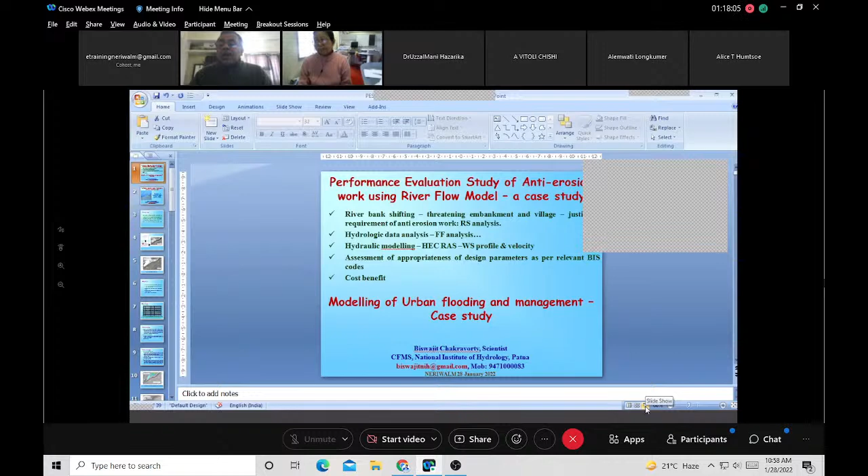Is the screen visible and am I audible? Yes, sir. Okay, so during the next 2 hours, maybe I expect I will finish in 2 hours. We shall be talking about two topics. Number one is performance evaluation study of anti-erosion work using a river flow model, and we'll be taking a case study.

As far as river shifting is concerned, we are all aware. When a river shifts, there is fear amongst the people living in the floodplain because it threatens embankments and villages. So in this presentation, I shall try to justify the requirement of anti-erosion work, whether it is at all required.

Here I shall take the help of remote sensing analysis. Then, if anti-erosion work is found necessary, we shall deal with hydrological data analysis, where we will carry out flood frequency analysis and compute the flood for different return periods. We'll also try to collect discharge data as well as cross sections available at the nearby site.

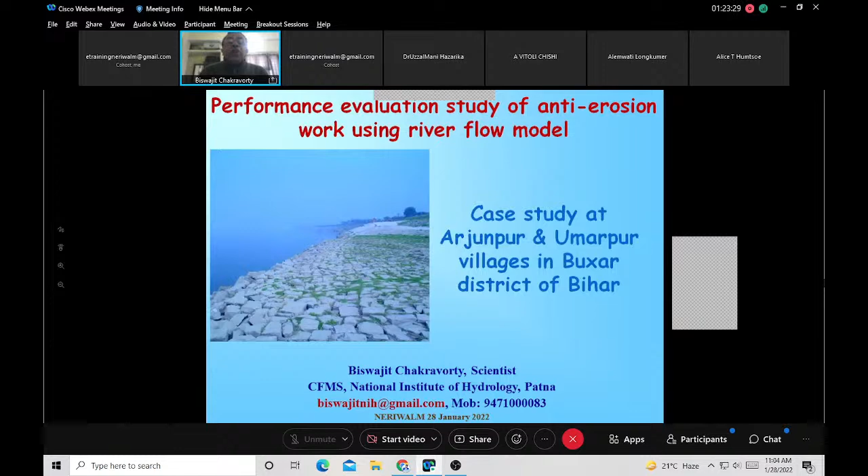So it's a case study at Arjunpur and Umarpur villages in Buxar district of Bihar. I shall be presenting this case study. First of all, let me familiarize you with the location of these two villages. The study area is...

near the Buxar Koilwar Ganga embankment. It is located on the right bank of river Ganga. The river Ganga has touched the embankment. This is the background of the anti-erosion work. The river Ganga has touched the embankment near Arjunpur and Umarpur village, and therefore the anti-erosion scheme was constructed during 2002. So the sites are located in Buxar district of Bihar.

First of all, see this case study, why I am presenting it - this will give you an insight into the step-by-step procedure to be followed. First of all, the remote sensing study, which will tell you whether the village is in danger, whether the embankment constructed is in danger, whether there is a likelihood of the embankment being breached and the flood water entering the village. That is what happened in these two villages in the past.

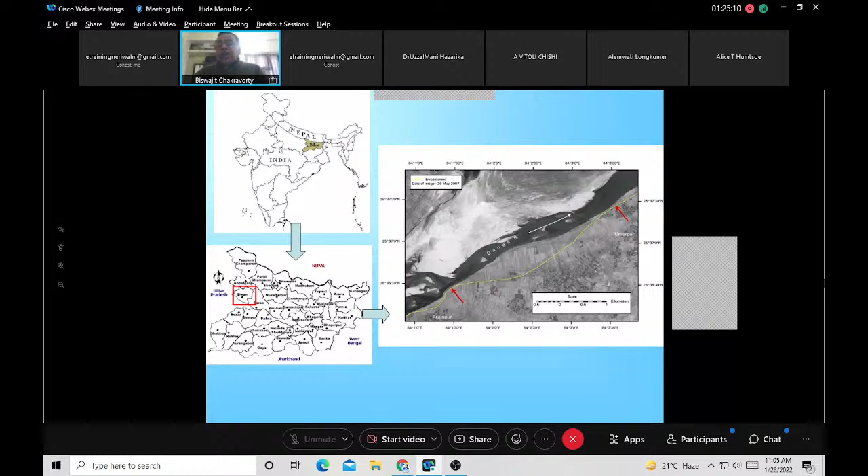So first, let us try to know why these anti-erosion structures were necessary. This is the anti-erosion work that was constructed in 2002 for a chain length of 30 chains. Each chain is 30 meters in length, so 30 chains means 900 meters. This is 900 meters. And similarly, in Umarpur, there is an anti-erosion work that has been constructed.

So this is about what has been done, and this is the blow-up of the location map of the study area. Now, the project objectives.

Preparation of a map showing the river bank line and embankment condition before and after the project. Am I audible? Hello? Yes sir, you're audible, sir. Okay, then let me proceed further, because with net connectivity, sometimes we are not sure whether my voice is reaching you or not. That is why I am very much concerned.

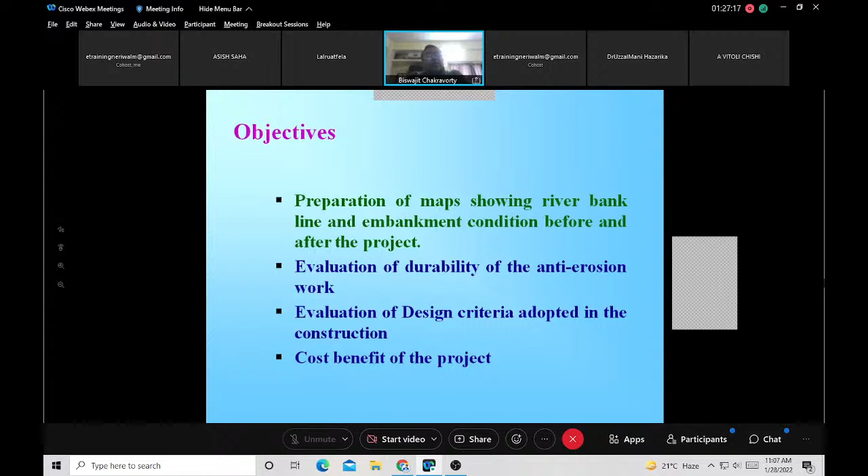So preparation of a map showing river bank line and embankment condition before and after the project. We were asked to find out whether the anti-erosion work was necessary. Number two, if the anti-erosion structure was necessary and it has been constructed, what is its fate once constructed? So evaluation of durability of the anti-erosion work, evaluation of design criteria adopted in the construction, then cost benefit of the project.

Since the first part of the study was dealing with remote sensing data analysis, we had to get the remote sensing data. So we used IRS 1C, 1D. Along with that, we also used PAN data so that we get details of the embankment and other details. At the same time, we also had the Cartosat data having a resolution of 2.5 meters. PAN data is 5.8 meter resolution. So this is about the satellite data that we have used.

Along with that, we have used hydrological data from CWC, annual maximum GD site at Buxar, river cross section from Water Resources Department, Government of Bihar, as well as from CWC. Then a socio-economic survey - we went to these two villages to ask the inhabitants whether the anti-erosion structure had benefited them.

So the methodology: preparation of river bank line and embankment maps. Here we have analyzed temporal satellite data. It consists of georeferencing of images of various dates, delineation of - as you saw earlier, these two villages are located on the right bank of the river Ganga - delineation of the right bank of river Ganga and delineation of the embankment. Satellite images are also analyzed for assessment of any damages or flooding in the nearby area. So this is the first thing we have done. Now let us try to see the details.

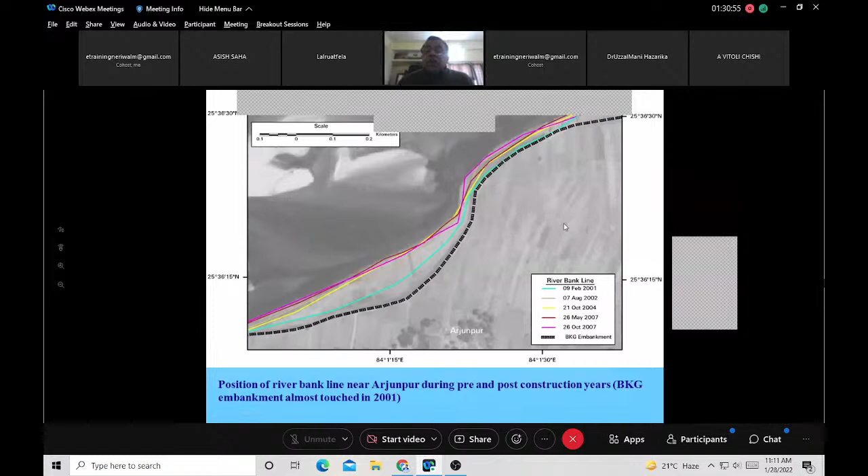So once the water entered into the village, villagers tried to go away from the village and find their livelihood somewhere else. So there was a shifting of the inhabitants of the village from Umarpur as well as from Arjunpur.

Second thing what we did was evaluation of durability. So here we have studied the river bank line and embankment condition to assess the effectiveness of the structure to sustain the annual peak flood.

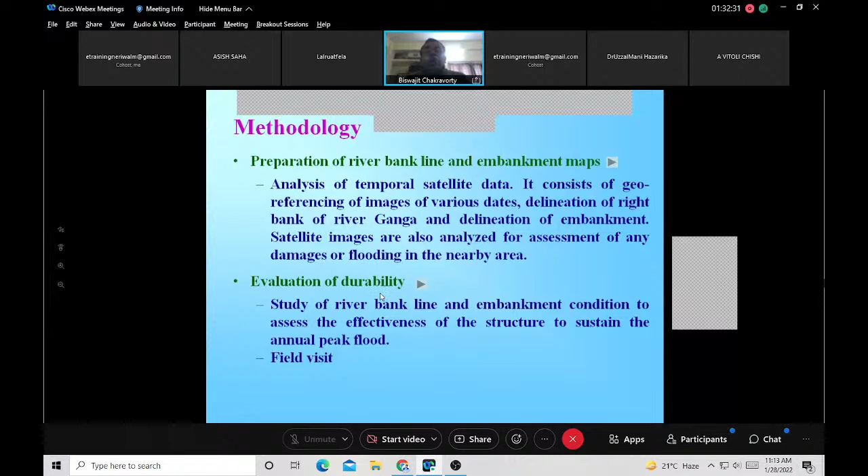So we had the data prior to the construction, during the construction, and after the construction. Let us try to see before, during, and after the construction of the anti-erosion work, what is the fate of the bank line. So here, this is the pre-construction scenario, a satellite image of 9th February 2001. Here we find that the river bank line has almost touched the embankment, so the village is threatened.

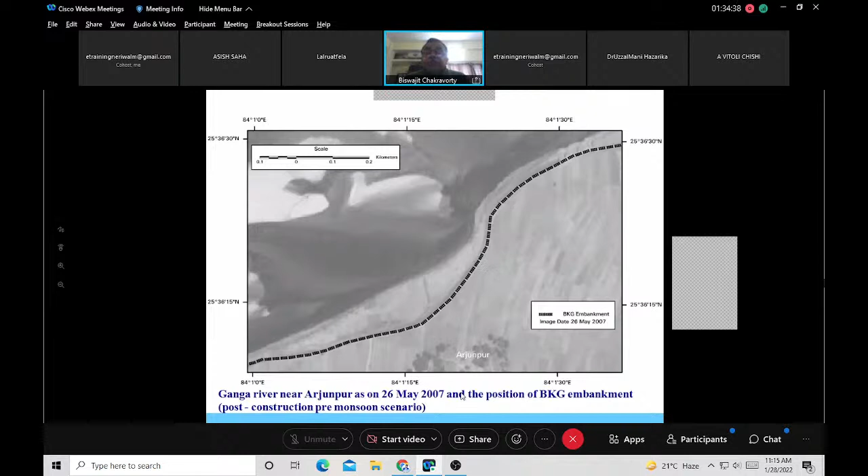Now let us see further. This is 26th May 2007, post-construction, pre-monsoon scenario. See, because of the anti-erosion work, this portion has been shielded, and I will show you that there is lot of vegetation that has come, and even people are growing some oilseed crop as well as some pulses. So this is pre-monsoon scenario, and this is post-monsoon scenario. Post-monsoon scenario also we find that the village is protected.

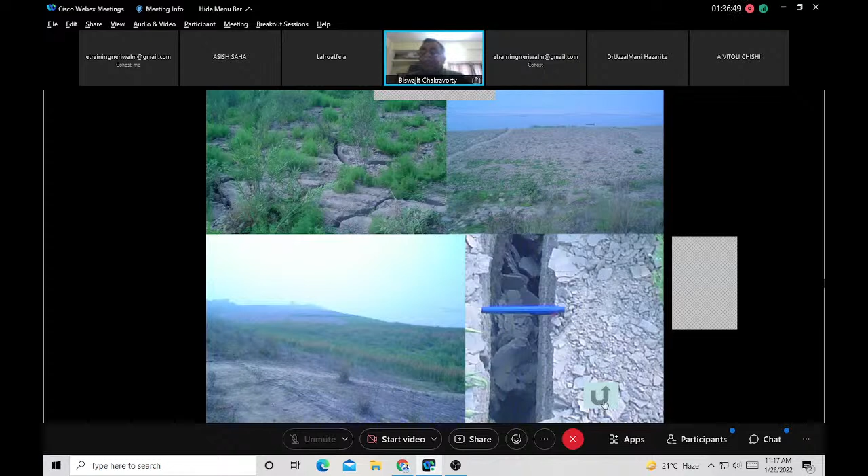Next is evaluation of design criteria. Project authorities, the Water Resources Department, Government of Bihar, has already constructed the anti-erosion work with the background that this much flood level may come, this much thickness of apron is required, and the weight of the stone should be this much. So we had to verify those things. While executing a project, you have to do this afresh - meaning if only input is from remote sensing analysis, if you find that there is a threat to the embankment or the village is in danger, then anti-erosion work is necessary. And number two, what are the design parameters?

So here what we have done is hydrological data analysis - flood frequency analysis for estimation of flood of various return periods, and the return period of the annual floods occurring after the construction of the project. Then we had to compute the maximum flow velocity and maximum water level at the anti-erosion site corresponding to 25 - I have written here 25 years return period. So guideline is available that says if you want to protect a village or agricultural land, the return period should be 25 years.

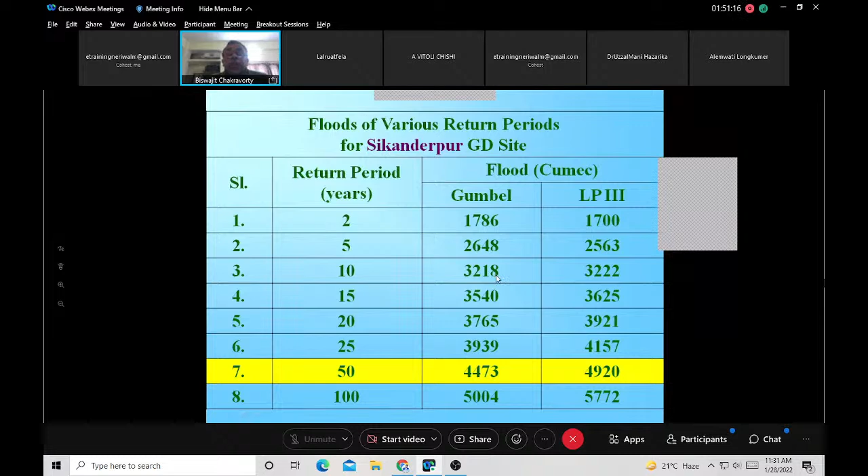So this is just an example that I have shown you. Once we are done with this, then we apply the HEC-RAS model to compute the water surface profile as well as the velocity profile. So we divide the flow length into different segments, and these are called cut lines.

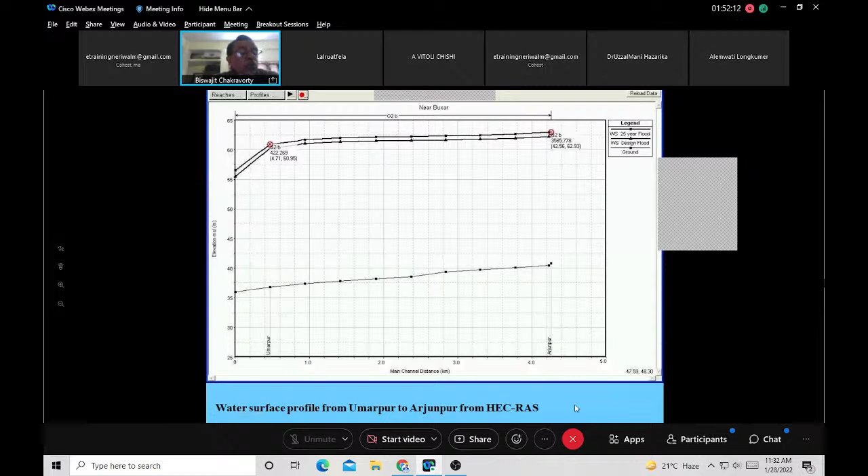This is the village Arjunpur, and this is the village Umarpur. Here we calculate the velocity profile, and we find that maximum velocity is 2.88 meter per second. Then we also compute the water surface profile and find the maximum level this can attain for a return period of 25 years flood for Umarpur as well as Arjunpur. Once we know these two values, then we can go further.

Checking of design parameters with BIS code. So we have to calculate the weight of the stone. The weight of the stone W on horizontal bed is expressed as W equal to this expression. What I like to emphasize here is that V is the mean velocity of water in meter per second.

Until and unless we are able to calculate the flow velocity corresponding to 25 years or whatsoever return period we adopt, so then it is V raised to the power 6. So this is a very sensitive parameter. We have to be very careful, and we have to calibrate the HEC-RAS model with care.

Here SS is the specific gravity of the stone. This is 2.65, and W is the weight of the stone. Now there is another problem: the weight of the stone estimated for horizontal bed would not be sufficient for the same velocity on the sloping bank, because only the component of self weight normal to the slope acts as a stabilizing force.

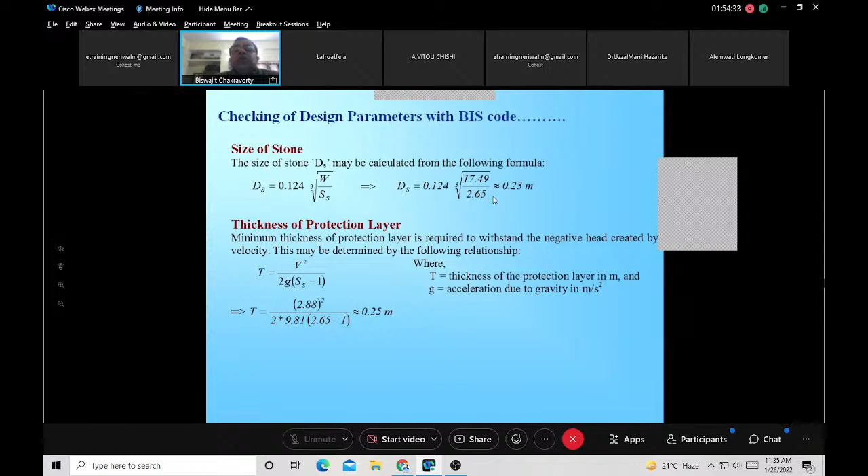This is 30 degrees. So K we find is 0.447. So the weight of the stone should be 17.49, almost 18 kg. Then size: likewise, this is the expression, and we compute the size as 0.23 meter.

Then thickness of the protection layer, T is the thickness. So we substitute these values and find out what is T, and it is seen that it is 0.25 meter.

Now, this is where we had to make a check on whatsoever the project authorities have constructed as this anti-erosion structure, whether this fits with what we have got from hydraulic modeling and comparing it with the BIS code. So here we find that whatsoever thickness or weight they have adopted, this is as per BIS standard.

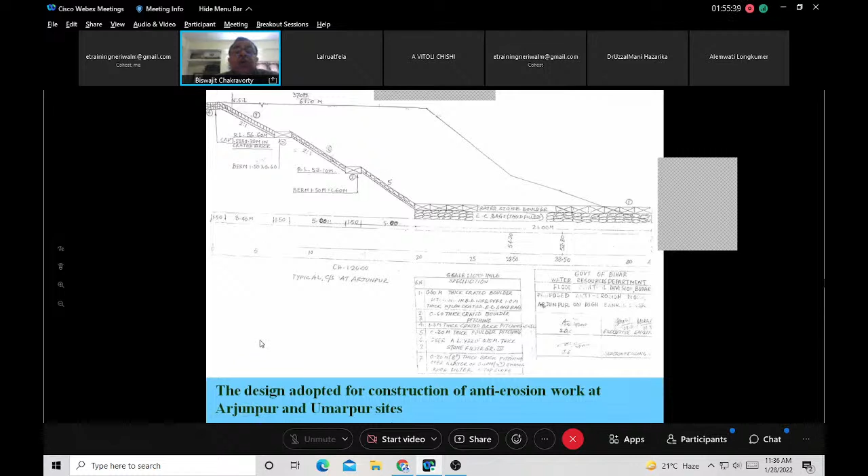The design adopted for construction of the anti-erosion work at Arjunpur and Umarpur site - this is the design that they have adopted, and this is what we have calculated. As per the project detail, the stone boulder of size 225 mm to 300 mm, weighing 40 to 54 kg, were put in crates of size 3 meter by 1.5 meter by 0.6 meter.

Filter was also provided as per BIS code. The upstream and downstream ends of the anti-erosion work have been provided with anchors. Therefore, the design is as per BIS code. So that is what we have verified, that whatever anti-erosion work was done, this is as per the BIS code.

Now the question may arise, why did we do all these exercises? What was the background? In fact, the project authorities, the Government of Bihar, wanted to protect some more areas downstream. So before giving a nod from the Government of India, they wanted a performance evaluation of the existing structure to be done.

So that is where we were involved. What we found is that the design is as per BIS code. Now the next part is evaluation of design criteria—we have checked that the design criteria is okay. So next is cost benefit analysis.

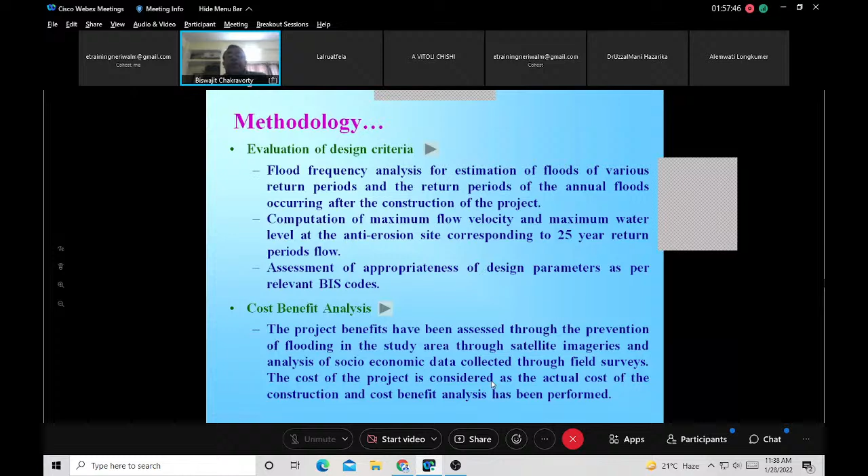The project benefits have been assessed through prevention of flooding in the study area, through satellite imageries, and analysis of socio-economic data collected through field surveys. The cost of the project is considered as the actual cost of construction, and the cost benefit analysis has been performed. So here what we have done, we have gone to the villages and interviewed the village people.

So here we can say that the flood protection work in general may be considered effective in protecting the BKG embankment—meaning the Buxar Koilwar Ganga embankment—and for Arjunpur and Umarpur village. As per the hydrological analysis of annual peak at Buxar bridge, the design peak discharge needs to be around 48,000 cumec, whereas the adopted design discharge as per the project proposal is around 43,000. So there is a gap.

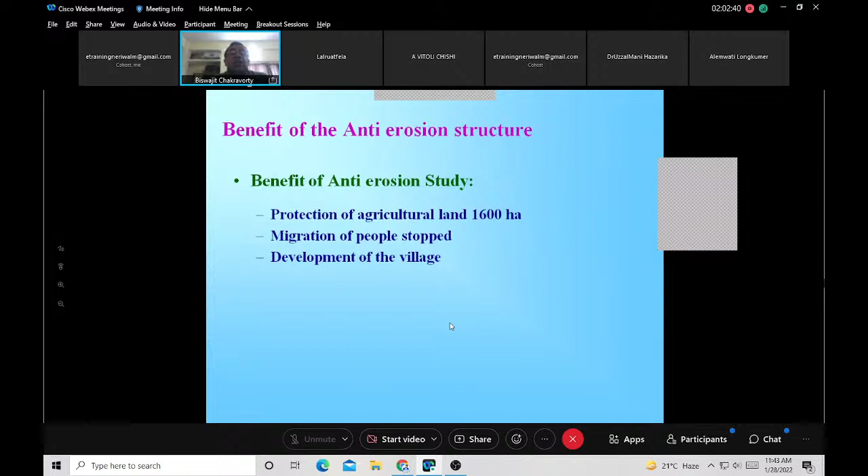So yesterday there was a question from a participant about danger level—what is a danger level? So I could find out from the handbook for flood protection, anti-erosion and river training works, CWC 2012, at page 2. It is given there. It's very simple information, but very informative.

Danger level is defined as a level of the river. I noted this because it is relevant for the present study, as well as there was a question yesterday. So a level of the river depicting the stage of the river which, if crossed by flood waters, will start damaging the crop. So first criteria is if it damages crop and property, and will affect the daily life of the population—this is the danger level. This level is to be taken as minimum flood level, medium flood level, or 0.3 meter below the plinth level of the residential areas. So they have also tried to pinpoint that if the water level is below 0.3 meter of your plinth level, then it should be designated as the danger level.

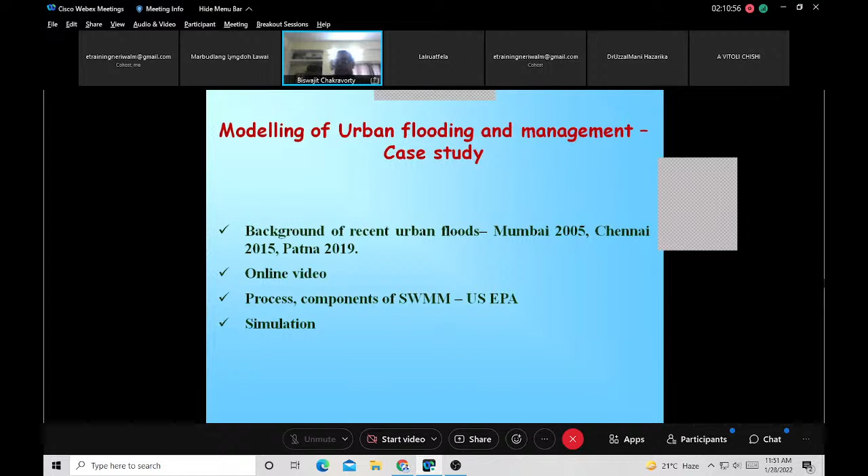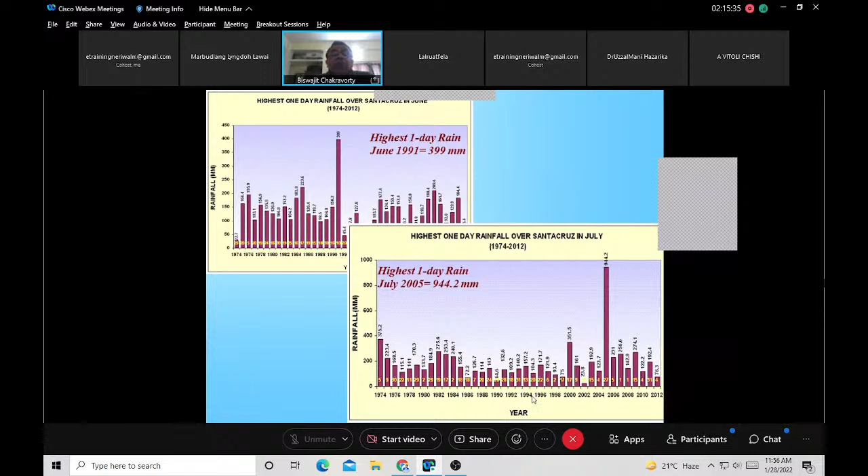Now let us try to see in detail the rainfall that occurred between 26 and 27, as recorded from IMD Santa Cruz. Very heavy downpour with intensity of 380 mm in 3 hours, between 14:30 p.m. and 17:30 p.m. That is more than 125 mm per hour, so this is very heavy rainfall.

This is between 8:30 on 26th till 8:30 on 27th — a 24-hour rainfall. This is more than 5 times the intensity of rain for which the drains were designed, and 2.5 times more than the intensity of rain for which drains are currently being designed. This was subsequently more than the design capacity of the stormwater drainage system, and hence flooding was inevitable.

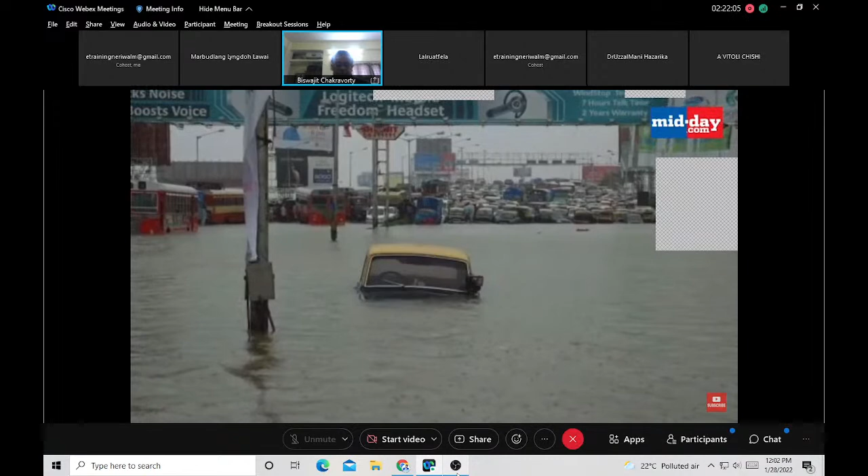Notice how there's no pre-roll ad? And here's July 26 — even the mention of the date is enough to bring chills. 14 years ago, on 26 July 2005, Mumbai was battered by heavy rainfall, which caused havoc across all areas, claiming many lives and leaving the city paralyzed. It is the day when rains brought the maximum city to a standstill. A large number of people were stranded on the road, lost their homes, and many walked long distances back home from work that evening. The rains pushed the maximum city to a shutdown, claiming the lives of over 1,000 people and destroying 14,000 homes. The city suffered a loss of Rs 5.5 billion by damaging around 52 local trains, 4,000 taxis, 37,000 auto rickshaws, and 900 BEST buses.

The rains could have damaged the city financially, but could not defeat the spirit of Mumbaikars. They were seen helping fellow citizens and stray animals. The floods were caused by the 8th heaviest ever recorded 24-hour rainfall figure of 944 mm.

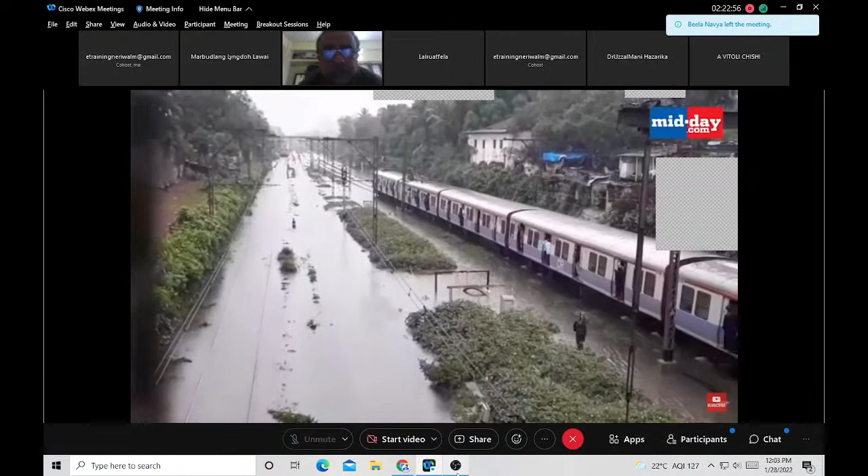Mumbai railways were majorly hit during the 26 July 2005 flood. Local trains came to a halt due to waterlogging on the track. People took to the railway track as they did not want to be stranded and wanted to get home quickly.

Waterlogging led to a dramatic increase in traffic on road, and many low-lying regions of Mumbai were submerged. Various vehicles such as cars, bikes, and scooters were submerged during the 26 July 2005 floods in Mumbai.

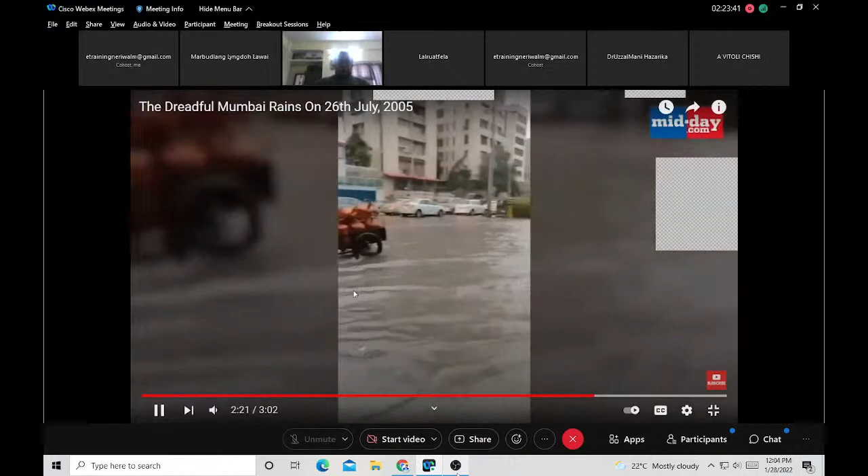At present, the monsoon rains and the subsequent flooding keep bringing back memories of the 2005 floods. Almost every year, the monsoon season brings scenes of distress from all across the city, depicting its struggle with rains.

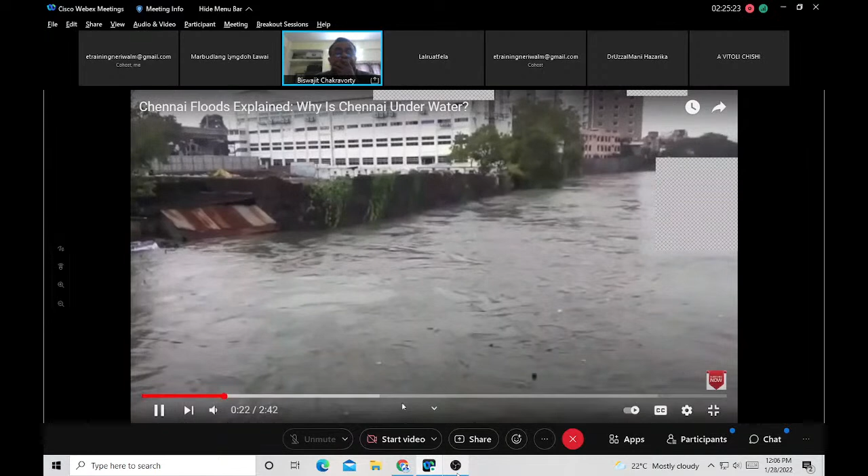The exceptionally strong El Nino, an unusual warming of surface waters in the equatorial Pacific Ocean, is to be blamed. Experts believe it could turn out to be the strongest ever recorded. The El Nino, together with a strong upper air divergence and high moisture content at lower levels, has affected the winter monsoon. But reasons for the catastrophic flooding lie beyond.

Excessive rains forced authorities to release a massive 30,000 cusecs from the Chembarambakkam reservoir into the Adyar River over 2 days, causing it to flood its banks and submerge neighborhoods on both sides. Similar flooding triggers were in action in Poondi and Puzhal reservoirs and the Cooum River that winds its way through the city.

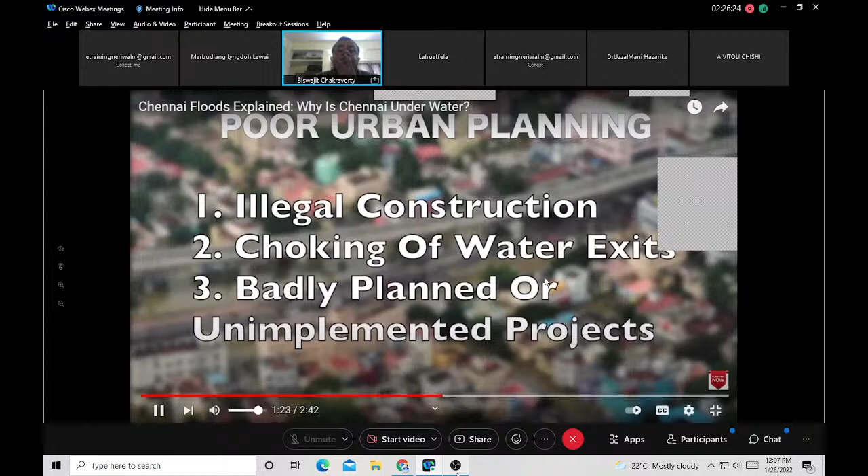Mindless urban planning of the city over the last 2 decades has made matters worse. Poor urban planning in Chennai has three aspects: illegal construction, choking of water exits, and badly planned or unimplemented projects. According to a report submitted by Chennai Metropolitan Development Authority to the Madras High Court, there are over 1.5 lakh illegal structures in the city responsible for the disappearance of over 300 water bodies.

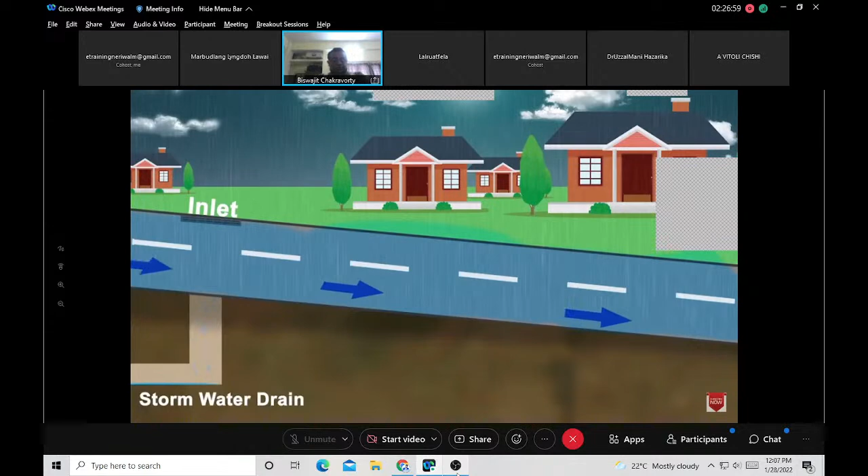Experts say that most of these projects have been executed without incorporating crucial data on the topography or the flood character of the site. So on one hand are these badly planned projects, and on the other, those that haven't seen the light of day, such as the early warning system to understand the runoff pattern of rainwater.

And laser terrain maps. Now, while Chief Minister J. Jayalalitha said during the earlier phase of heavy rain last month that damage during the monsoon was inevitable, facts suggest that the disaster could have been man-made.

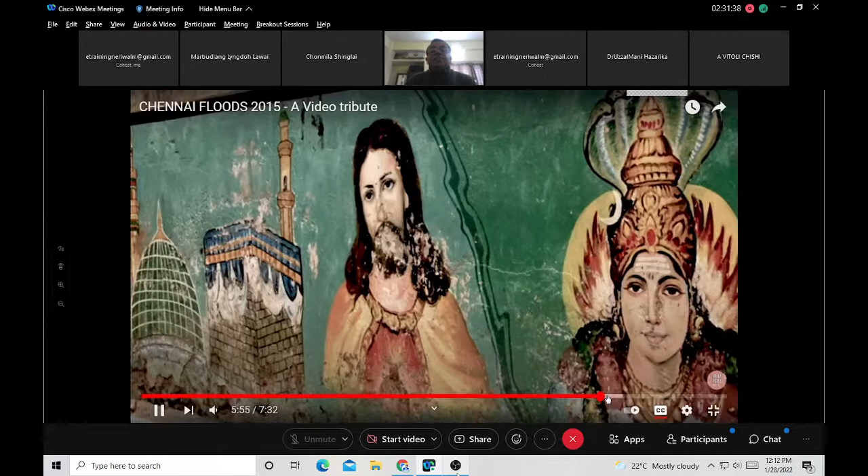Now, since I will be presenting this Patna flood, just a glimpse of the Patna flood of 2019. It is not very old, this is just recent.

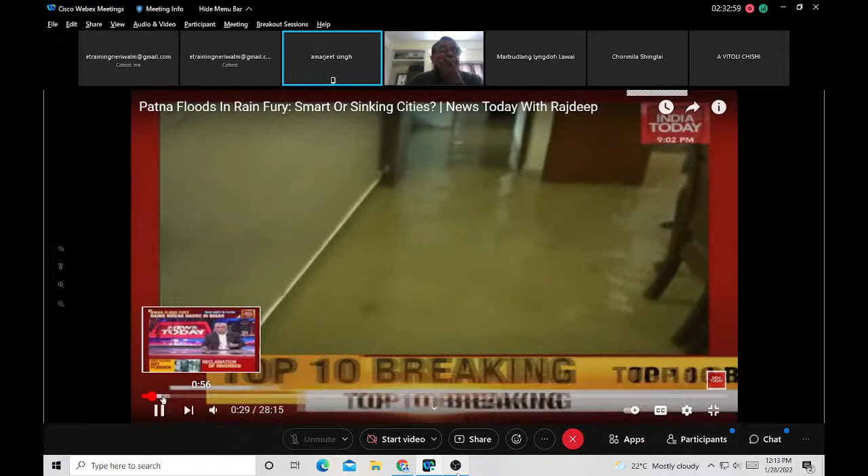Unceasing rain. The deluge in Patna is seen to be its worst since 1975. A city is collapsing - it's our top story.

Grounded for 3 days, help reached them on Monday. His family was among the 26,000 rescued so far in the city.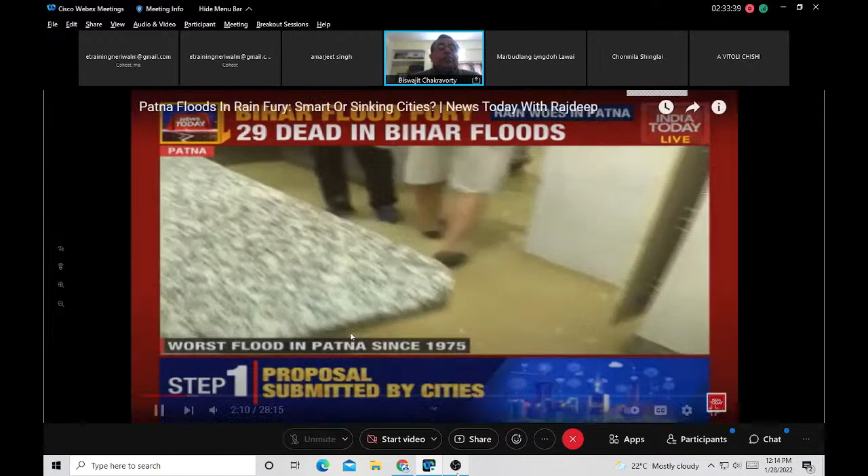Sushil Modi was not alone. BJP leader Rajiv Pratap Rudy, JDU's Ajay Alok, and Union Minister Ramvilas Paswan all found their houses submerged in water.

Right now we are at the Sri Krishna Puri police station, and it's very difficult to understand what kind of situation is prevailing here due to the waterlogging.

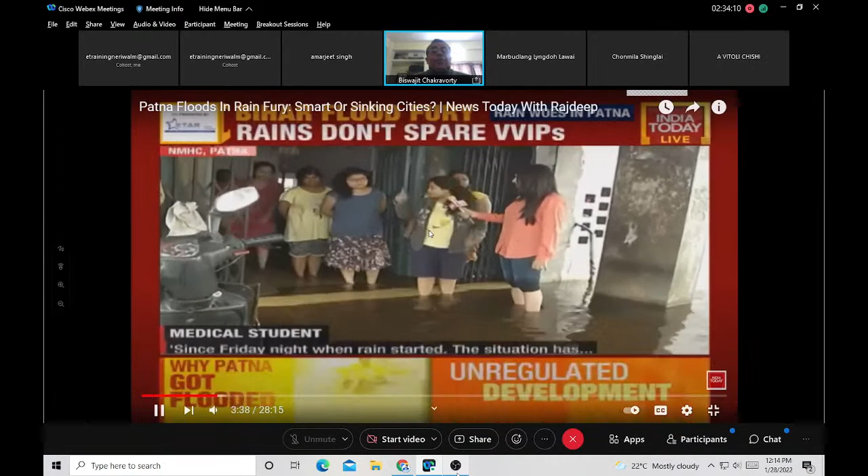Patna is just a symptom of a bigger ailment, that of India's crumbling urban infrastructure. With Sujit Shah, Rohit Kumar Singh.

Okay, thank you for watching this video. Now, is this screen visible to you?

Some slide. No, sir? Huh, it's not visible, sir. This is not visible. Okay, let me try to put it again.

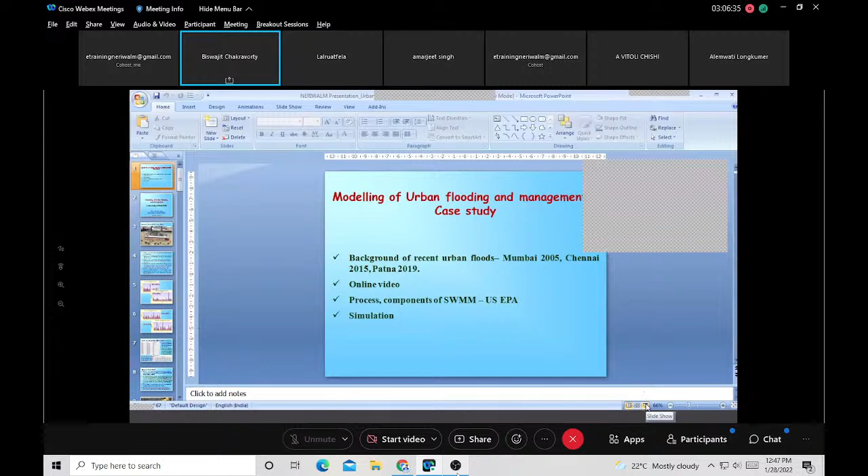So this is the condition of the drain that I was trying to show. In the recent past, Patna was heavily flooded in 1975-76. There was severe waterlogging in 1990, 1997, and 2019 in the town. Small boats could be seen on the road.

Due to flat topography, storm water does not flow under gravity to the river Ganga, or to another river called Punpun, during the period of flood. Pumping is the only means to dispose of the rainwater of the town.

The causative factors are rapid development of new unplanned colonies and their commercial activities without a proper drainage system, which has aggravated the problem of waterlogging. I showed you the video of Chennai city - there also it was mentioned that unplanned development of colonies, and a lot of people coming to the town with indiscriminate growth of habitations, are causative factors for urban flooding.

On top of this, there is no proper garbage disposal. Most of the garbage you will find on the drains, and that is choking the drains.

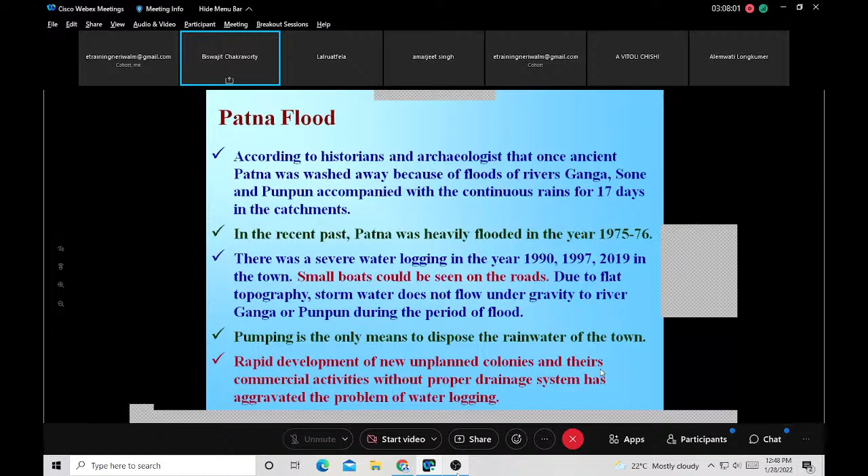So the objectives were: evaluation of the existing stormwater drainage network efficiency of the study area, computation of inflow and outflow hydrograph at various outlets, and water surface profile along the stormwater drains. It also had the objective to find the feasibility of improvement of the existing stormwater drainage network and propose an additional network to avoid urban flooding, and finally technology transfer.

So, if any new city is coming, then we can plan for urban drainage. But for an old city, we cannot just uproot the old system and install a new one, because there are already habitations, so we have to be careful.

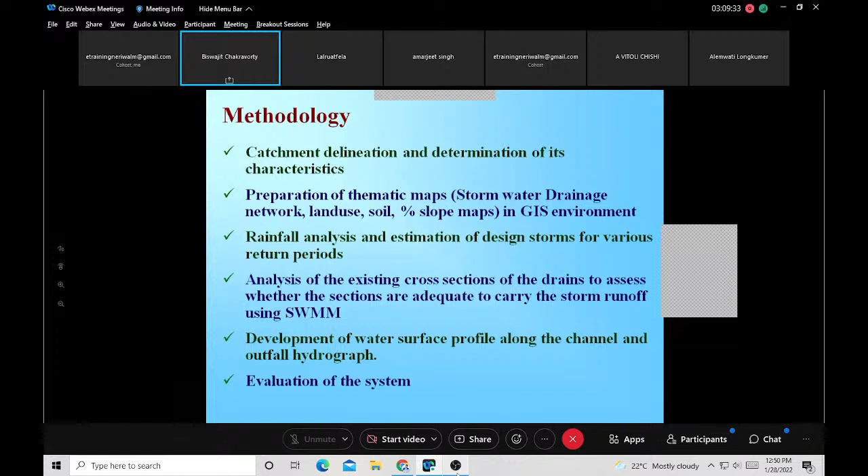So the methodology: catchment delineation and determination of its characteristics, preparation of thematic maps like stormwater drainage network, land use, soil, and percentage slope maps in a GIS environment. Then hydrologic analysis of rainfall, estimation of design storm for various return periods, analysis of existing cross sections of the drains to assess whether the sections are adequate to carry the storm runoff using the stormwater management model. Development of the water surface profile along the channel and the outfall hydrograph, and evaluation of the system.

So these are the processes of the storm to sewer network. Rainfall occurs, falling on the catchment, then through sewers and conduits it comes to an outlet. As far as rainfall and catchment characteristics are concerned, it is dealt with in a hydrological model. When there is flow from the nodes to the links and finally to the outlet, it is dealt with in a hydraulic model. So the tools used are GIS and EPA SWMM.

This is the model we are using. This is a network of the drainage system found in an urban city - these are buildings, there are parking lots. Rainfall is occurring and it is being accumulated from the roads, parking lots, etc. These come from a catchment, and they come to nodes, then through a link these come to different points.

Sometimes these are also treated. There are weirs, there are pumps, and finally there is the outfall.

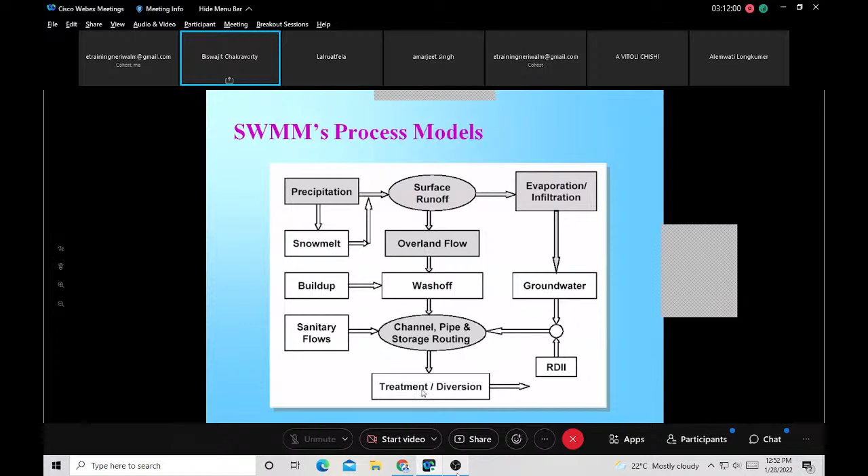So these are the process models: precipitation, then surface runoff, overland flow, then channel pipes and storage routing. There are treatments, then ultimately it is in the outfall.

What are the hydrologic modeling features? It is spatially and time varying rainfall. These are the features. If it's varying rainfall, it can deal with evaporation of standing surface water.

This can be dealt with. Snow accumulation and melting can be dealt with. Interception from depression storage, infiltration into soil layers, percolation into shallow groundwater. This can be dealt with. Then interflow between groundwater and channels, then non-linear routing of overland flow.

Hydraulic modeling features: it can handle a drainage network of any size. It can accommodate various conduit shapes as well as irregular natural channels. This I will show you.

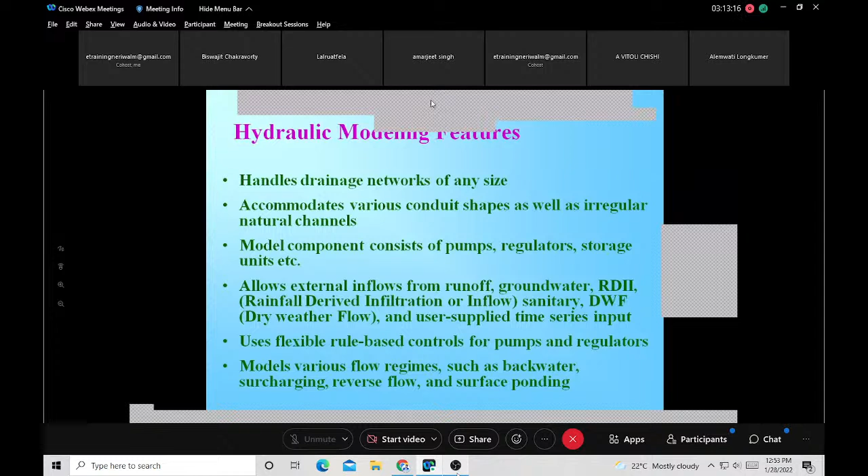Model components consist of pumps, regulators, so it allows external inflows from runoff, groundwater, then rainfall derived infiltration or inflow. Then it is from dry weather flow, sanitary flows, and user supply time series input.

It uses flexible rule based control for pumps and regulators. It can model various flow regimes such as backwaters, surcharging, reverse flow, and surface ponding.

So it has got a very wide variety of features to handle. It can deal with groundwater, surface water. It can deal with reverse flow or backwater effect from the sea, etc. This can be dealt with.

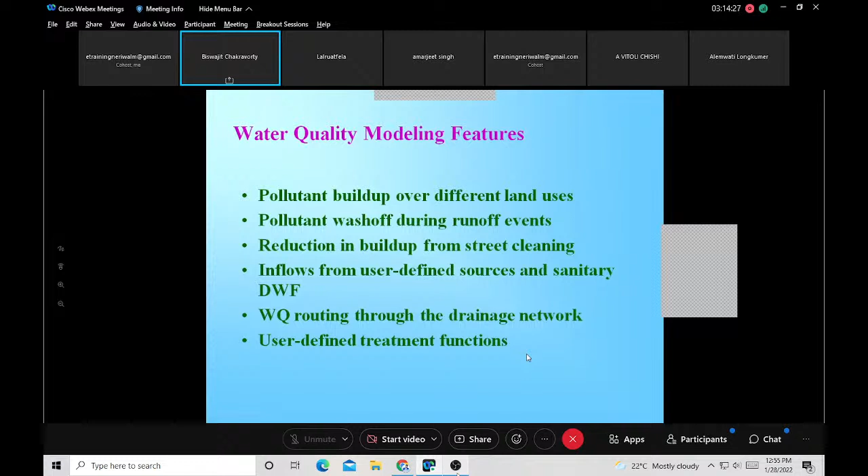Then it is also capable of doing water quality modeling, features like pollutant build up over different land uses, pollutant wash off during runoff events. All these can be dealt with in this SWMM model.

Typical applications: design and sizing of drainage system components including detention facilities, floodplain mapping of natural channel systems, then control of combined sanitary sewer overflows, then generating non-point source pollutant loading for waste load allocation studies, then evaluating best management practices.

There are certain limitations. It is not applicable for non-urban watersheds, not applicable for forested areas or irrigated cropland. Cannot be used with highly aggregated, for example daily rainfall data. We need hourly or sub-hourly rainfall data. It is an analysis tool, but not an automated design tool.

Now, the flow routing algorithm uses the one-dimensional Saint-Venant equation to solve this problem, to calculate the water surface profile as well as the velocity. In this particular exercise, we have used the full one-dimensional Saint-Venant equation. This is the full equation it solves.

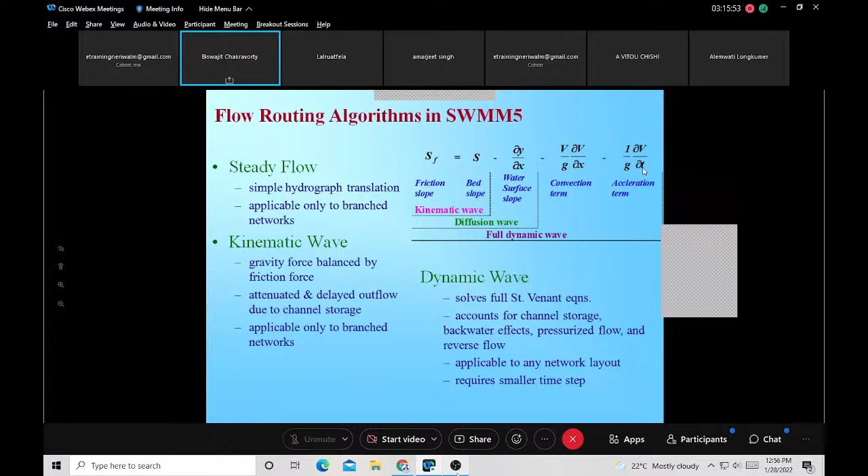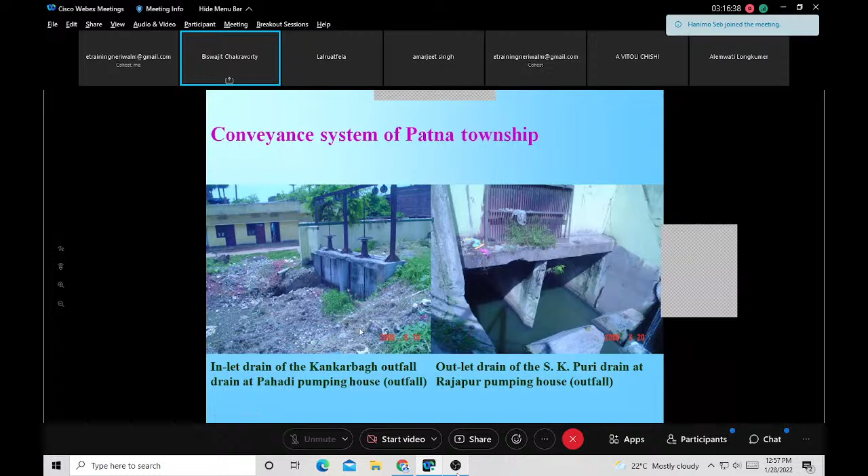So this is the conveyance system of Patna township. Mostly you will find that drains are not cleared. Had it been cleared, then most of our problems would not have been there. So these are different outfalls. This is the pumping house; water level gauge we have installed here for carrying out our study.

This is one of the outfalls. This is another outfall. So this is the line diagram of Patna; it is divided into several zones like Western Zone, East, Central Zone, Southern Zone, and Eastern Zone.

The Western Zone, Central. Am I audible, sir? Am I audible? Yes, sir. Very well, sir.

So it is divided into Western Zone, Central Zone. Western Zone deals with the drains; this means urban water through these conduits, and it is going to some outfall called Kurji outfall. Then another conduit goes to Rajapur outfall, Mandiri outfall, Antaghat outfall, Krishna Ghat outfall.

This is going to River Ganga. And there is another river called Punpun. There is an outfall here too, Pahadi outfall.

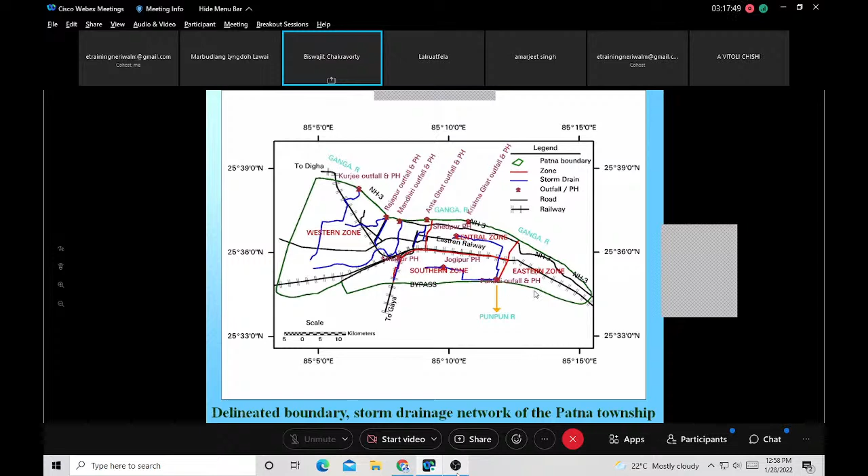Before carrying out the study, we had to find out the length of different drainage networks in the town. Somewhere it is 6 kilometers, somewhere 8 kilometers, somewhere less. This covers the Western Zone, Central Zone, Southern Zone, and the names of the drains, all enlisted here.

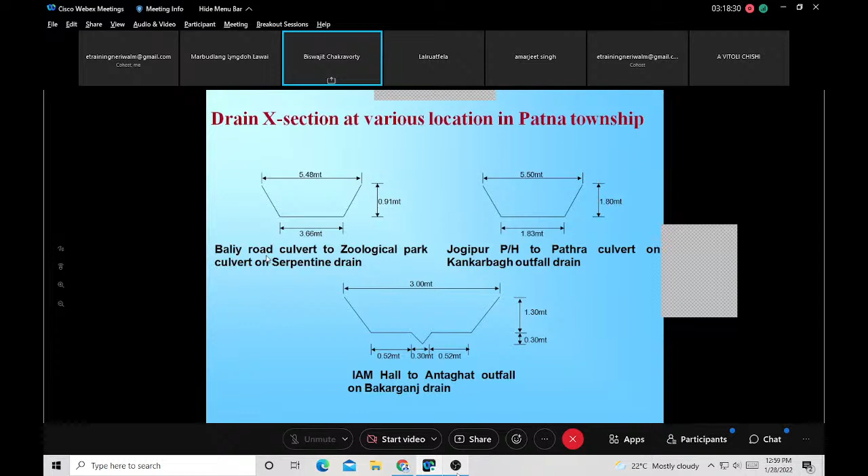These are the drainage cross sections we could collect from the municipal authorities at different locations. Before conducting this study, first we had to know the detailed topography of the area.

Mostly you will not find detailed topography of an area. The Survey of India topo sheet is 1 in 50,000. The municipal area maps we could collect had 1 feet contour interval, and that was also not for the whole of Patna town, so additional spot heights had to be collected.

So we could generate the DEM of the study area. Then from the DEM we could find out the percentage slope of the study area. With these two pieces of information, we could segment the whole of Patna into 50 different segments.

These are called sub-catchments, small areas that are segregated. In total, there are 50 such sub-catchments.

During the last 30-40 years, Patna, or for that matter any urban city, has undergone a lot of changes, with a lot of built-up area coming up and many impervious areas created.

This is the land use classification that we have done. This land use classification gives us an idea of how much is pervious and how much is impervious in the area, what are the different land uses, how many water bodies are there, roads, railways, low-lying areas, etc.

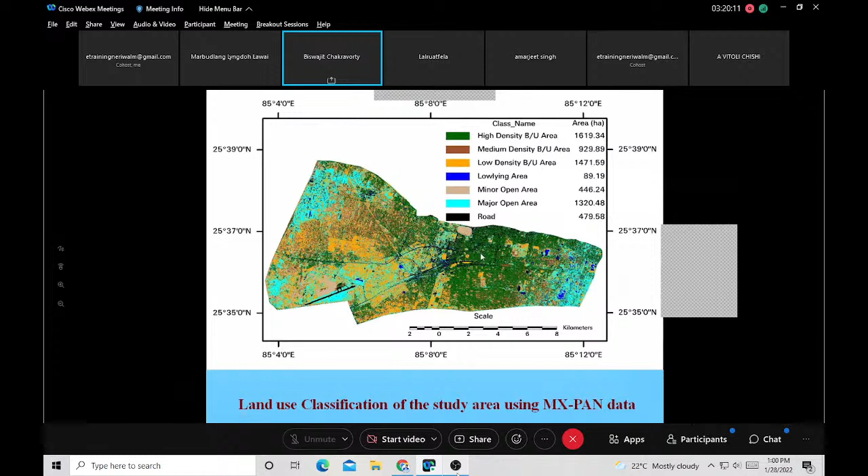This is data preparation for the SWMM model, the stormwater management model. As I said, the area has been segregated into 50 sub-areas, and these have been dealt with separately. From these sub-areas, called subcatchments, water is collected in a junction, and from the junction it is carried through a conduit to a particular outfall.

I will try to show the network, if it is okay, and I will show the simulation of how we have done it.

These are the characteristics of a subcatchment. It contains a name, and we give it codes just for better identification. It has an X coordinate and Y coordinate, and it is associated with rain.

Whether this rain gauge contributes to this subcatchment or not - if there are many rain gauges, or if there is a rain gauge in this subcatchment, we can take the data from that rain gauge.

There is an outlet here. This has been designated as KRJEN1, meaning it is a node - a junction. So the name of the outlet is KRJEN1. The subcatchment name and this outlet name look similar, only the last two alphabets differ, for better identification.

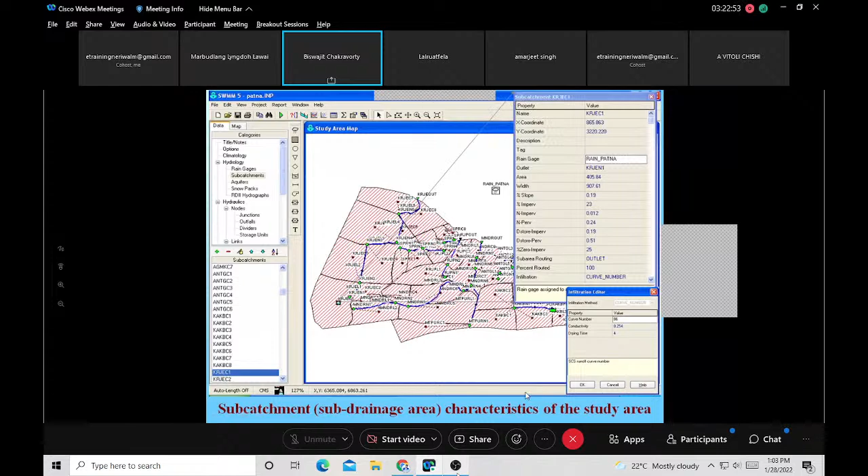Now let us move from the subcatchment characteristics to the node and link characteristics. This is junction or node characteristics, like inflows, whether there is any treatment plant available, the bottom elevation of that junction, the maximum depth, and the initial depth. These are the parameters we have to insert as input to the model.

Then there are links, which are the cross-sectional areas. These are the conduits - somewhere elliptical, somewhere rectangular, somewhere trapezoidal or circular or pressurized flow, or even an irregular shape, as shown here.

So one such network of drain, starting from a point till it comes to an outlet, is shown here, and its parameters are given here. For this cross section, the elevation at different points, starting from zero, from left to right, is given here.

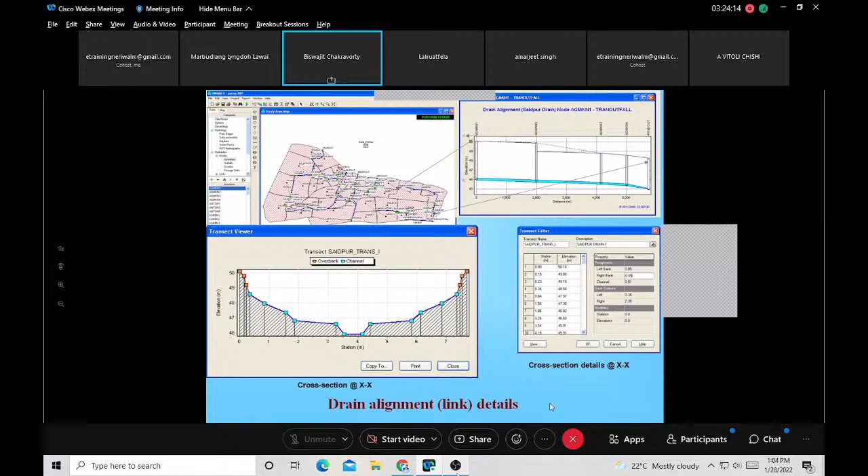Drain alignment. Then we come to the hydrologic analysis - rainfall analysis from 1975 till 2005, 2006, 2007. We had the rainfall data; this is the yearly maximum daily rainfall occurred in a particular year.

Initially I said that this daily rainfall is not enough for urban drainage study, so from daily we picked up the hourly maximum rainfall. Then we did frequency analysis to find out the return period of various rainfall for different return periods.

Then we distributed that rainfall. This is daily rainfall, and we had to distribute it through some mechanism. Some coefficients are available somewhere, so we applied this and found out the distribution over 24 hours. Once we arrived at the storm for a particular return period, then we went to the actual work.

For different outfalls, we have run the model, and the model computed the hydrograph, discharge versus time. It has computed the hydrograph, but that hydrograph is for a particular rainfall. So when the rainfall was occurring at the same time, we also went to these outfalls and measured the velocity with current meter, etc.

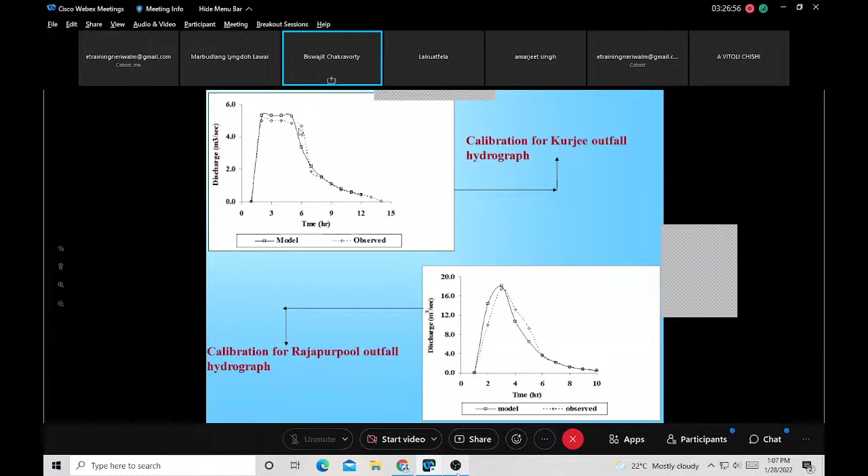It has solved the Saint-Venant's equation and computed the water surface profile. And we found that the model is behaving well because our observation also speaks the same language. This is calibration at Rajapurpool, this is at Kurjee, this is at Mandiri, this is Pahadi.

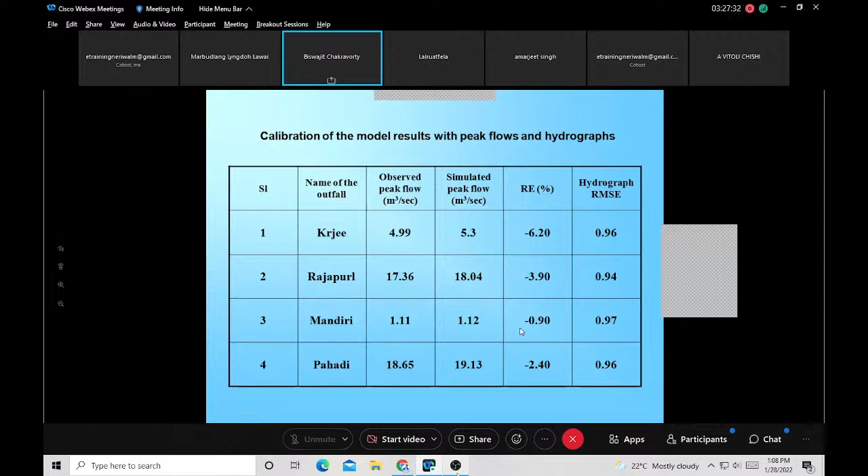So once we were satisfied that at different outfalls the model is behaving well, we have gone for different prediction. So we found out how much is the error between the observed peak flow and simulated peak flow, and we found out what is the root mean square error, what is the relative error, etc.

for different outfalls. So once we knew that, then we tried to simulate the model for 2 years return period rainfall, and found out what are the hydrographs at different outfalls. So wherever there is a lot of contribution from the catchment, it will have a higher peak than the other one having a lesser number of subcatchments.

So this is the outflow hydrograph at various outlets for 2 years return period rainfall. So here we find the drainage system - this is one of the drainage systems, this is 7 kilometers. You should keep in mind that this is not to scale, so it is not a direct fall. This is over a length of 7 kilometers.

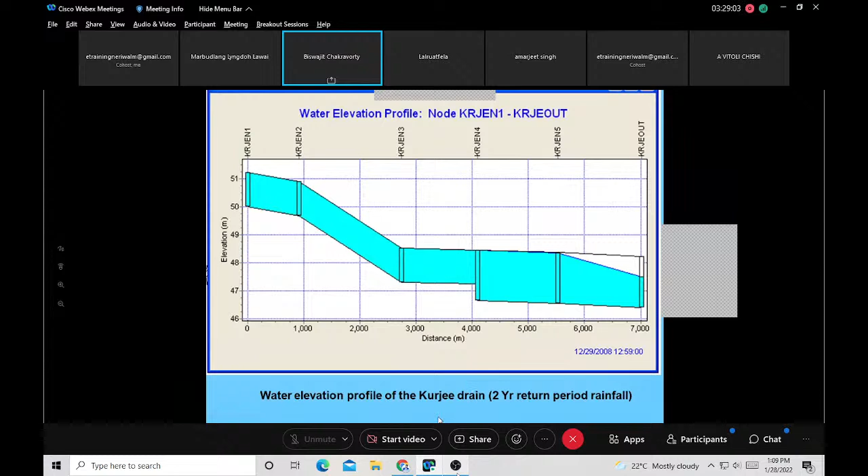This slope - so what we find here is even the existing drainage system is not able to accommodate even 2 years return period rainfall, because this drainage system is totally full. Totally full means it is spilling out and causing waterlogging. This is the case not only for this conduit, this one drainage system - the same story is applicable for other drainage systems.

You see here there will be spilling out. Here too this means a drain will be spilling out. This is a Kankarbagh drain. See, after some point there is a sump. It pumps water to another line, and then it flows to the outfall.

From here, it is going to Pahadi outfall. See, from here there is a slope, from here there is a slope, so it is going to this outfall. Similarly, for another Mandiri drain, you see that it is totally full and it is spilling out.

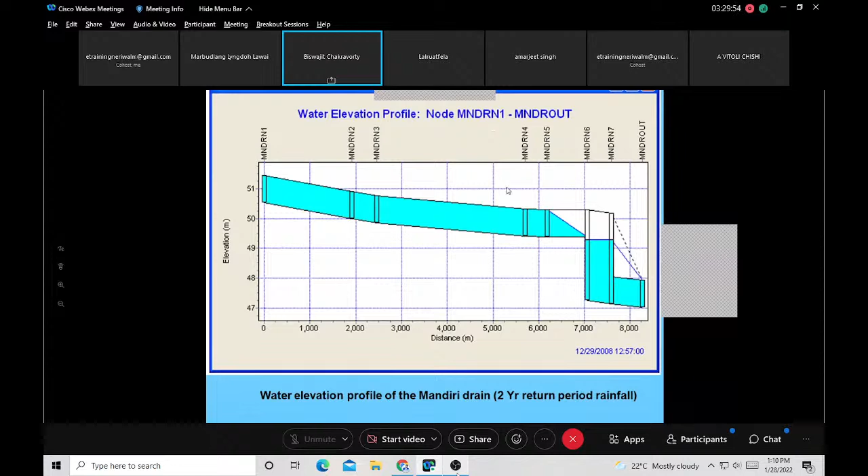Another drainage network, it cannot accommodate 2 years rainfall. So once we establish that this drainage system is spilling out, definitely the total inflow - this total inflow is more than the total outflow. So when the total inflow is more than the total outflow, this portion, this minus this, is going to cause surface flooding, which is depicted here.

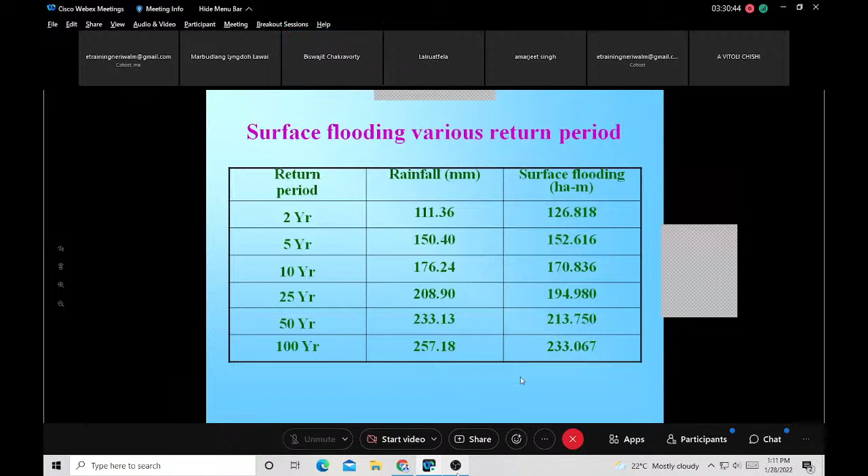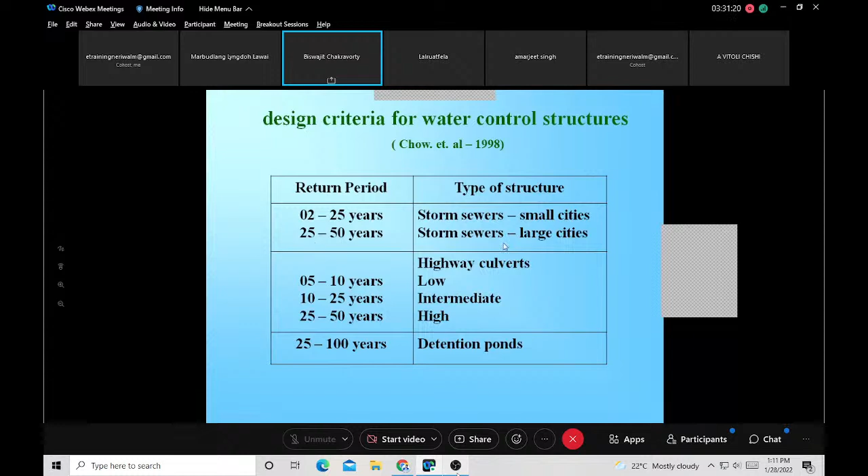So the design criteria we have adopted is a 50 years return period. It is for the large cities. For small cities, it is in between 2 years to 25 years, and for a larger city, it should be 25 to 50 years return period that we should take.

Trapezoidal sections we have modified to rectangular. Wherever there was irregular cross section, we tried to modify that. Once we did so, we tested our model again, and we found that it can accommodate 50 years return period rainfall.

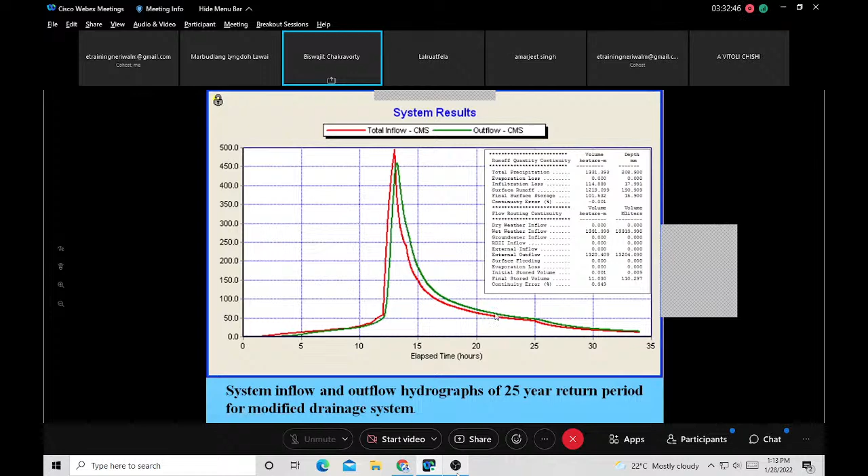So what we find is that there is a lag between total inflow and outflow, which is obvious. The total inflow and total outflow are almost matching, so there is no flooding here. The area under total inflow and area under total outflow are similar, meaning there is no flooding in the area.

So we could calculate or compute the outfall hydrograph at different outfalls, namely Kurjee, Rajapur, Mandiri, Antaghat, and Pahadi, and this has been quantified. Once we did so, let us see what the effect is.

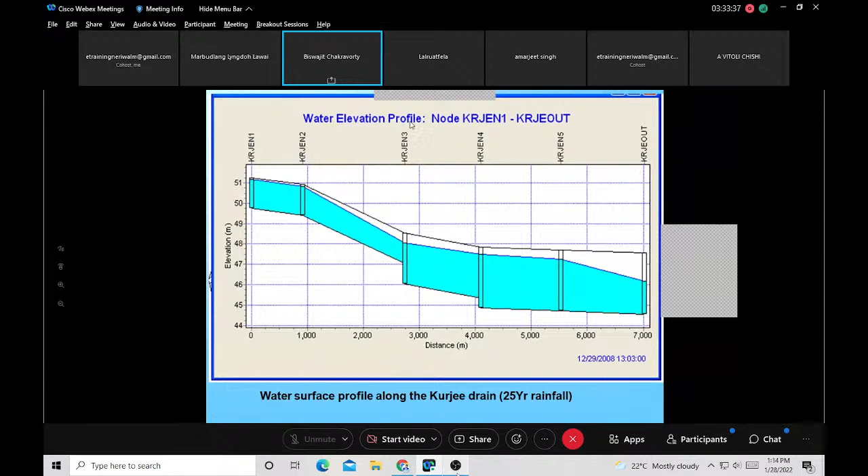We did not stop there. Once we had the hourly distribution of rainfall for different return periods, we wanted to test it for the severest storm. So we went to IMD, collected their SRRG chart, and from that chart found out the maximum intensity of rainfall that occurred in 15 minutes. Sometimes in a year the rainfall is not uniform - at some particular duration there is maximum intensity, and we wanted to capture that.

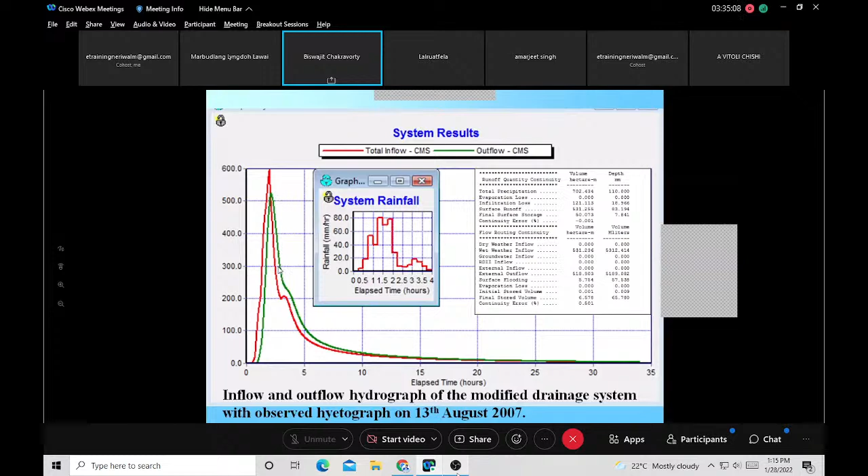For that, we referred to the individual SRRG chart and found out the actual rainfall in 15 minutes. We also tested our model for 13th August 2007, when there was maximum rainfall, and we found that our drainage network is behaving well almost throughout.

Once we did so, we had to transfer this knowledge to the department, and that's what we did. So this is about the presentation. Now I would like to show you the simulation within a short time, so that you can better appreciate it.

Now, is it visible? Is the screen visible to everybody? Yeah, it is visible, sir. It is visible.

So, let me show you - this is one of the subcatchments. For a subcatchment, these are the different parameters that we have inserted - its area, its width, percentage slope, etc., and what is the curve number.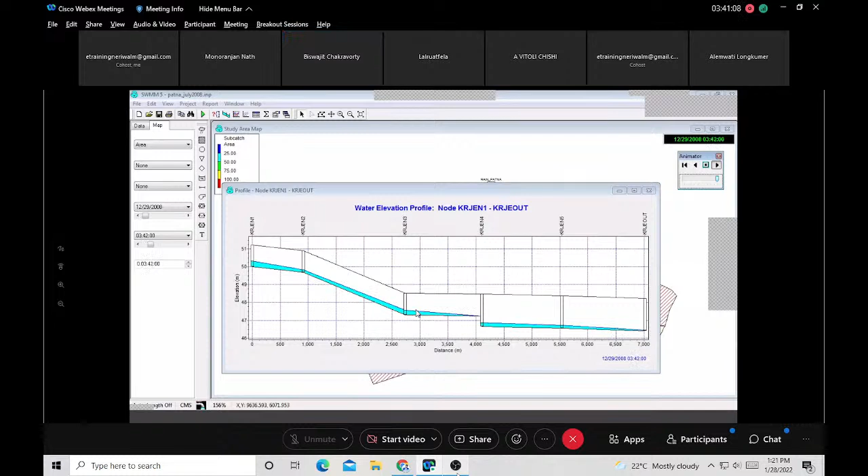Will you mind if I overshoot time by a few minutes? Although I am going a little bit quickly. See, you will find that after 12 hours, 12 hours was the peak rainfall. I'll show you.

See, here there is a timer. It is 9 hours, it has gone. At 12th hour, there was maximum rainfall. You will find that whenever there is 12th hour, it will completely fill the drainage system. It will spill out. See, it is spilling out. So it is spilling out, but at the same time, after some time, it is coming back. Drainage system is being cleared.

Similarly, I'll show for one more. So this is coming down. This is for a particular rainfall. So now let us see the rain gauge time series, rain 1. So this is the rainfall, that at 12th hour there is maximum rainfall.

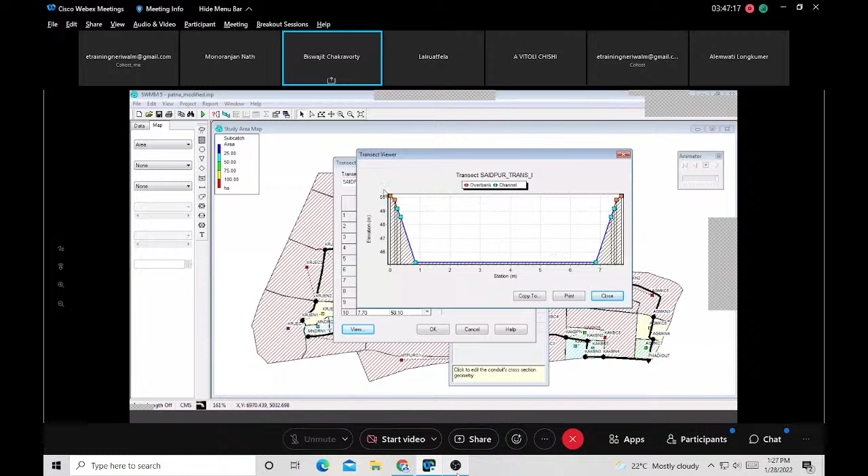This one is irregular view. See, earlier it used to be something like this, having less conveyance capacity. Now we have tried to extend and increase its conveyance capacity by modifying the existing drainage network. Likewise, we did for most of the drains.

This one I showed you. So now let us see how this system behaves. So before we see, we have to simulate whatever input data is there. We have to simulate. So simulation is now going on.

So simulation is successful. Now let us see how the drainage system behaves for the same drainage network. This is the starting node, so this one is the end node, and okay, find path. Okay, so this is the profile.

So now let us try to simulate it. And now let us see, it should not, I repeat, it should not spill out. That is what is our intention.

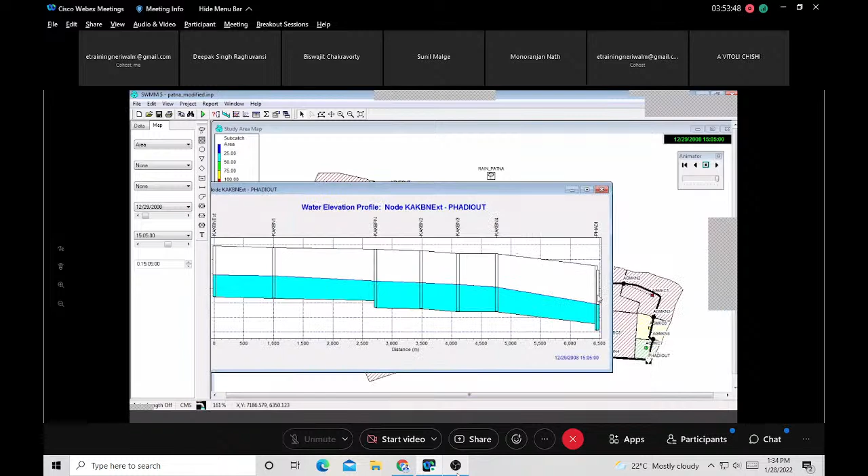So now let us see this link. Starting node is this one, ending node is this one. And we find that it will not spill.

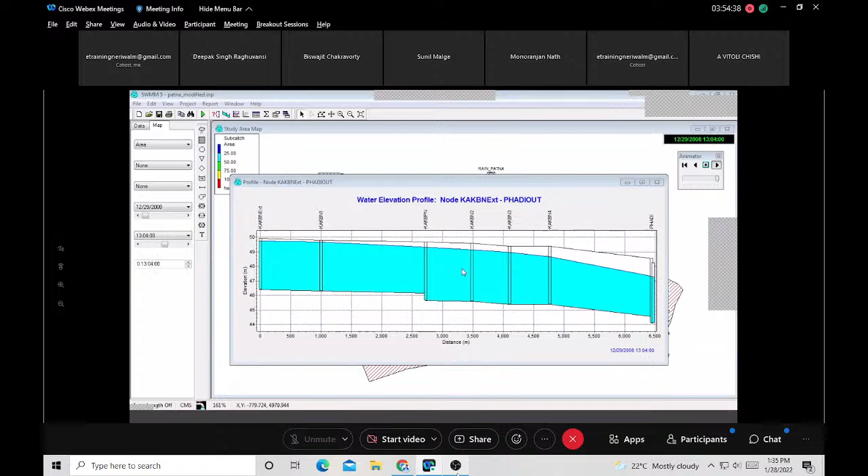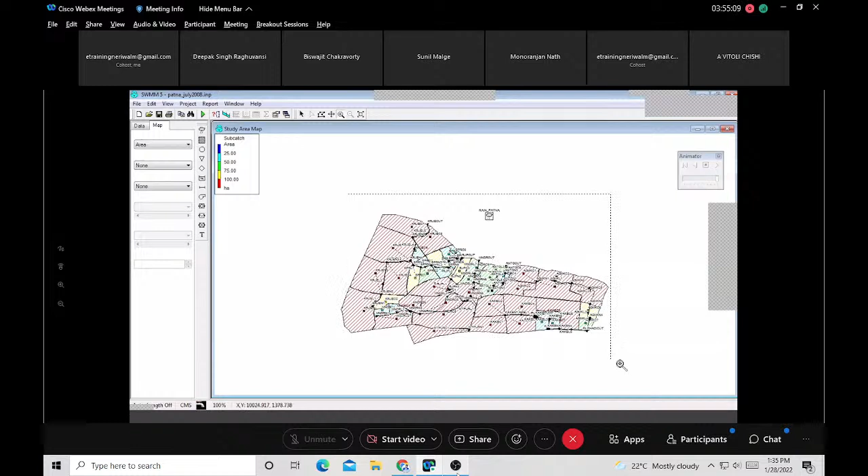So let us go out of this exercise. I'll show you one of the outputs here. This is when the system was not behaving well, it was spilling out. I forgot to show you one of the simulation results. Now you have seen that the inflow and outflow are matching. Here the inflow and outflow will not match.

So what we have got, let me now close this one. Okay, now what we have got - see on the screen, without going to the site, we are able to know how a drainage network system behaves.